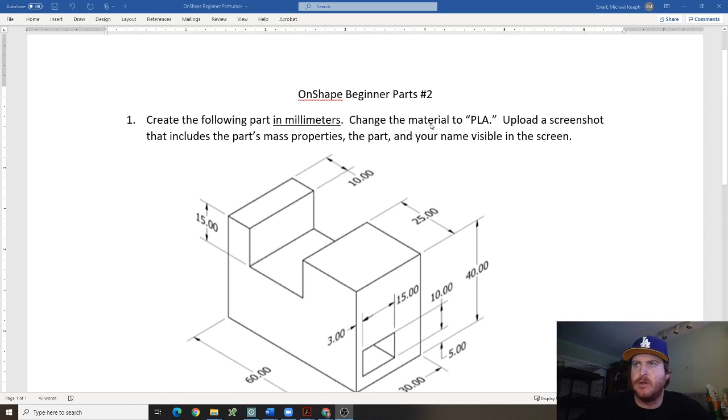Okay, so I'm going to talk about our second OnShape part 2. For this one, we want to be careful: all of our dimensions are in millimeters. We're going to use the material PLA, which is a 3D printing plastic. PLA is a type of plastic commonly used in 3D printers.

So we're going to go ahead and make this shape. Now, we want to decide: do we start from the front side, top side, or right side? I think the front has the biggest shape overall. We could start off with that big block, a 60-millimeter wide, 40-millimeter tall block, and then cut out this rectangle. If you cut out that rectangle, you'll have to do some math: 60 minus 10 minus 25. Or we can just build this shape here and not worry about that. Either way is totally fine.

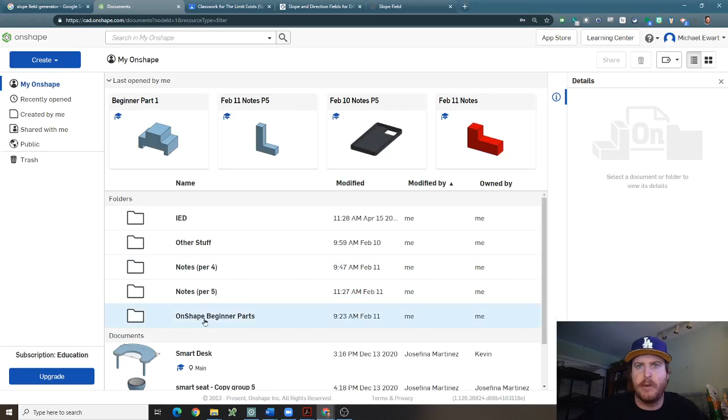But I'm going to start off on the front side, in this bottom left corner. So we're going to open up our OnShape. I'll go to our OnShape beginner parts folder, create a new document, and title this beginner part 2.

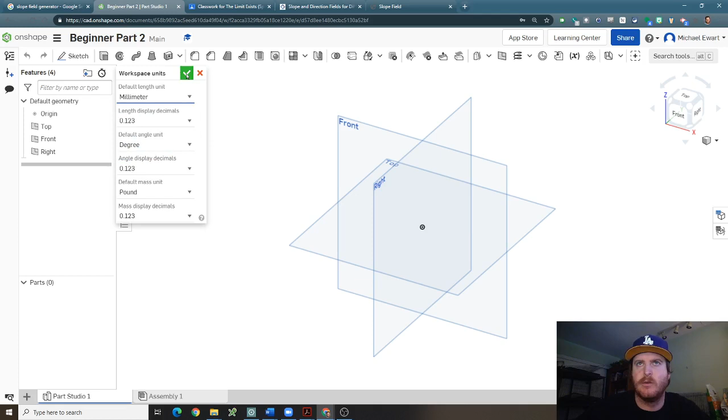And before we do anything, because this is in millimeters, we've got to go to these 3 lines and change our units from inches to millimeters. We'll hit the check mark, and now we're going to start our sketch on the front. Right click it and view normal to sketch plane.

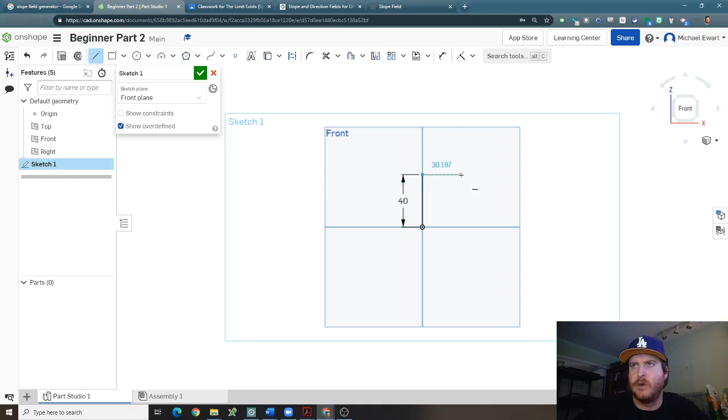I'm going to go ahead and do the line. I'm going to go up by 40, then go to the right by 10, making sure we get this horizontal line, not slanted, by 10. Then we're going to go down by 15. Then we don't know how far we go over, so we can either do math or go over and decide it later.

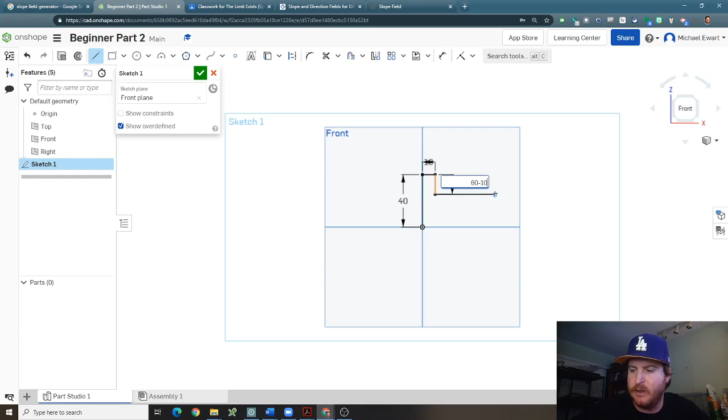I'm going to do math, and actually I'll show you OnShape will do math for us. We know the entire thing is 60, the left side is 10, and the right side is 25. So this would be 60 minus 10 minus 25 to give us that third side, and we can actually type that into OnShape. When we do our dimension, we just type in 60 minus 10 minus 25, and OnShape does the math and gets us to 25. It's a little hard to see, but there we go, the 25.

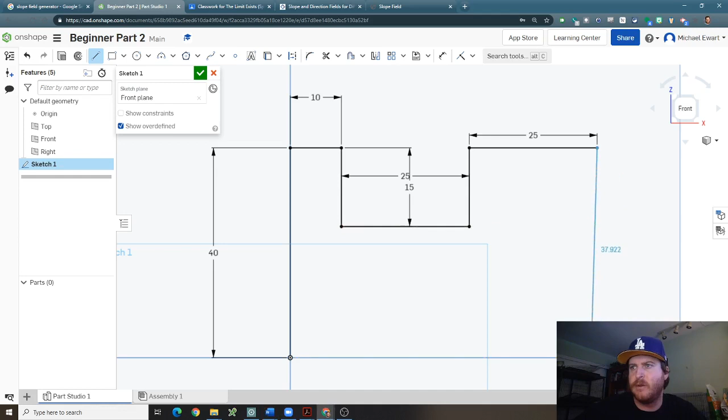Then we're going to go back up. It doesn't give us this dimension, but we can see that they're parallel, so we want to make sure that little orange line appears, showing us we're at that even mark. Then we go over by 25, then down all the way, and kind of finish it off. Again we want that orange dashed line to appear, and if I hit escape, everything should be black, meaning it's fully defined.

We're going to finish that sketch, right click, go to our isometric view, and now we're going to extrude it. We'll click on it, and it extrudes by 30 millimeters. Direction doesn't really matter here. We'll hit check mark, and now we're almost done, but we're missing this cut.

If it doesn't tell you what the cut is, assume it's all the way through. I should add that to the directions, that that hole is all the way through. But if it only went back a certain distance, it would tell you. So this is a rectangle, 15 millimeters wide and 10 millimeters tall.

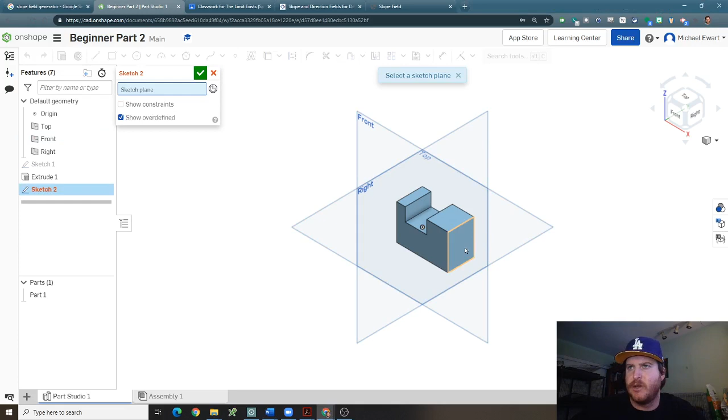So we're going to start a sketch on this right side, then right click it, view normal to sketch plane. Zoom in a little bit - you can hit the right key to zoom in how you want to. So we're going to make a rectangle, and we said it was 15 wide and 10 tall. So 15, enter, and 10, enter.

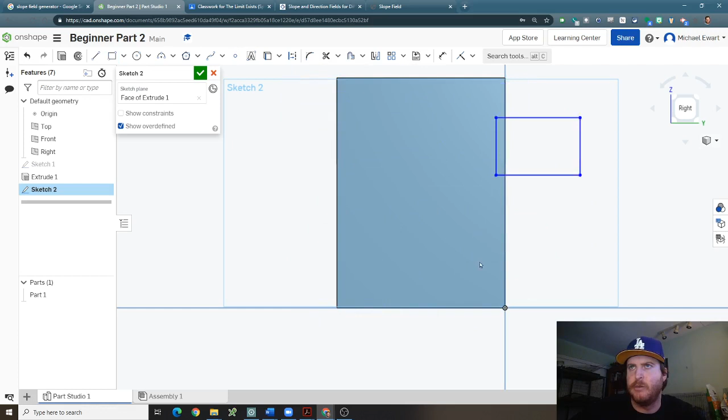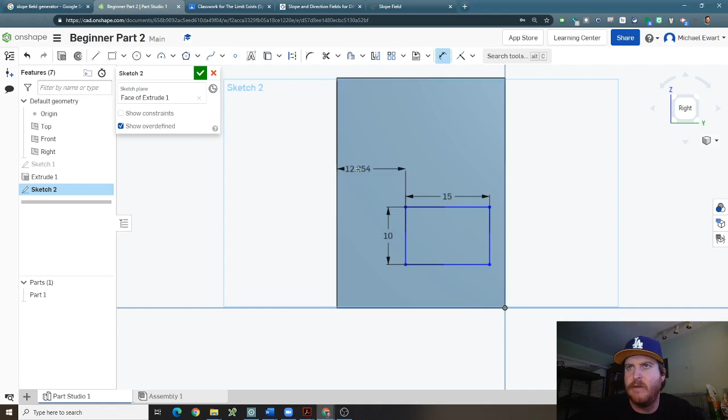So we're going to go to our dimensioning tool with the 2 arrows. Click on the left side and the left side, and mark that as 3. And the bottom side with the bottom side, and we'll mark that as 5. Now if I hit escape, everything has turned black, it's all fully defined. We can finish the sketch.

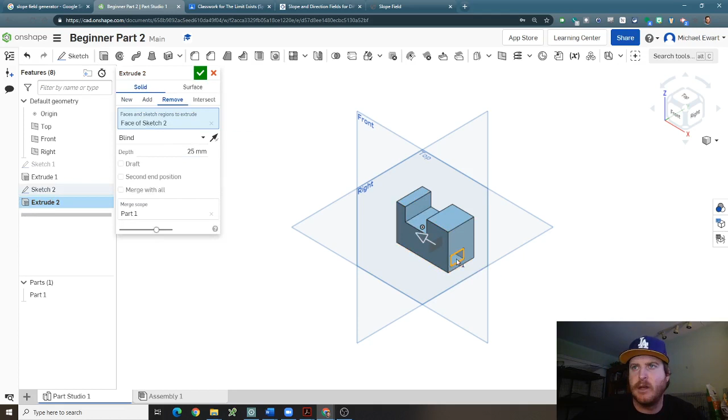Right click, go back to our isometric view. Then we're going to extrude. We're going to click on just the rectangle. We don't want to add material, we want to remove, and I want to not click blind - if I hit blind right now, it wouldn't even go all the way through. If I looked on this side, it's not coming all the way through. I want to change it to through all, and now that's going all the way through.

So we'll finish that sketch, and that's it for this one. Now, if you want to color it, you can color it - right click it, edit the appearance, give it whatever color you want.

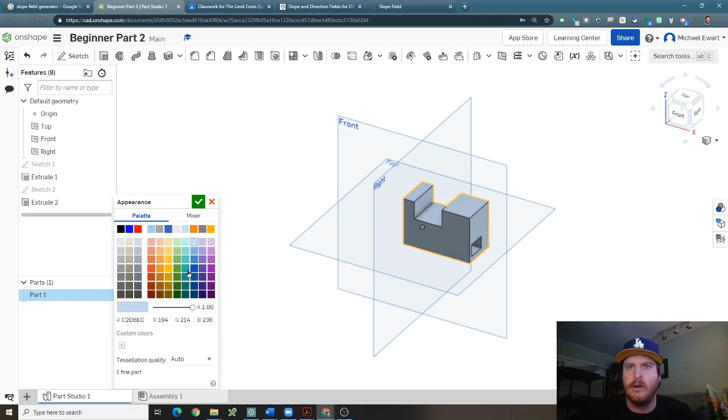And then we're going to right click it, assign our material, and this one asks for PLA. So you can just start typing PLA - remember we said it's a plastic. Actually, it's giving us all these different plastics as a guide. ABS is another really common 3D printing one. So we want to go down and find PLA. We'll hit the check mark.

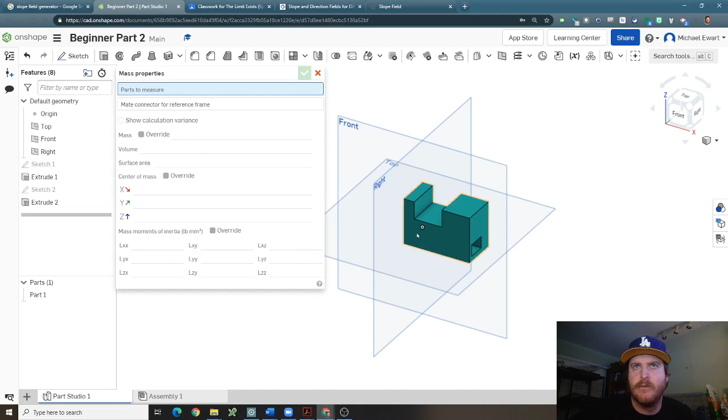And then you will click on your mass properties, click on part 1, and these are the answers you guys should get: 0.143 pounds, 51,750 millimeters cubed, and 13,650 millimeters squared.

Take a screenshot of this, and then with your name in the upper right corner, you will submit that to the assignment. Let me know if you have any questions, and good luck with this part.